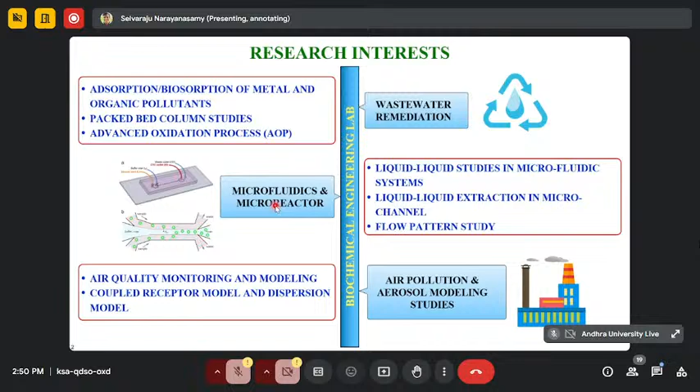So basically we have to develop a novel adsorbent. Why do you want a novel adsorbent? Because it always gives good adsorption capacity. So we are targeting these main pollutants: dyes, heavy metals, antibiotics, and rare earth elements. For example, in Tamil Nadu, Tirupur has heavy dye pollution.

And if you take heavy metals, IIT Guwahati is located near the Brahmaputra River, and we found that heavy metals, especially arsenic, contaminate the Brahmaputra river water more. Of course, in North India there are most of the rivers, especially the Ganga. We used to test most of the rivers, but we found the heavy metal arsenic more in the Brahmaputra water.

Then antibiotics. This is mainly because after COVID, everyone started to use antibiotics and they're simply discharging them to water bodies. Then how we have to remove this also. Then finally we come to rare earth elements. It's mainly from mining activities. Here we deal with rare earth elements, cerium. So in total, the four, how we are going to treat them with adsorption. Then we'll take it to industry level scale.

So once everything is done, we have the toxicity studies. We can even call this a plant doctor. One of them is Professor Lingaraj Sahoo here. So after testing, we go on to test different types of toxicity studies, like seed toxicity studies and then microbial. So finally we come up with evidence that our discharge is safe.

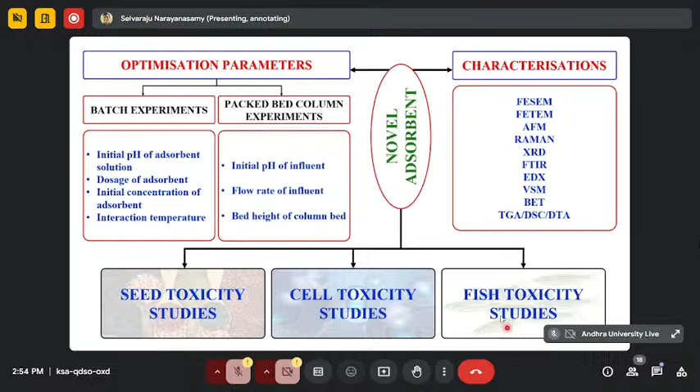After everything is done, of course, we have to go for these studies, seed toxicity studies and different types. So that's the overall picture of our work.

So you take activated carbon, and there are basically two types of modification. One is physical modification, the other is chemical modification. In physical modification, you take any biomaterial and heat it up, so you physically modify it with temperature. But chemical modification means you add some compound, and then automatically you can enhance the adsorption capacity. But I won't discuss this too much.

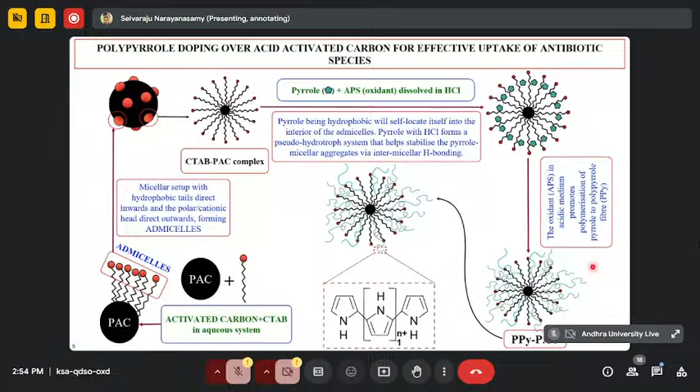So basically we take activated carbon and have done some modification. Finally, chemically modified activated carbon is available. Once done, of course, you have to do SEM and TEM, whether it is really porous and able to adsorb the pollutants. For example, we have different types of pollutants, dyes and others. So how are we going to handle that? We have to check the porous textures before and after. That's the purpose of this.

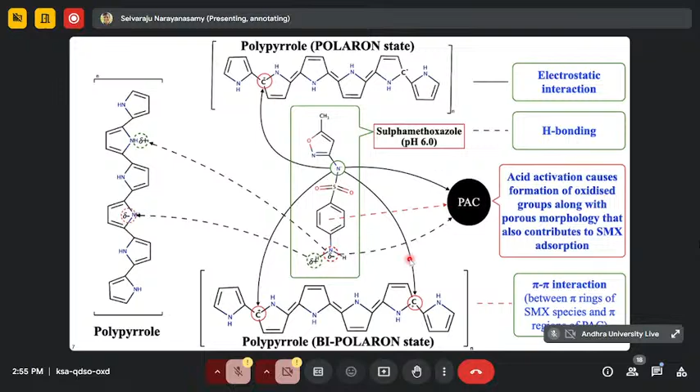This I leave, because then we used to study bonding, the interaction, pi interaction, hydrogen bonding, all, but I'll skip this because this is very difficult to understand. So once that's done, the other one we prepared is called chitosan hydrogel. There's plenty of material available. Normally we use it as a raw material, it's very easy, and cost-wise it is very low. So we can always use it as a raw material for treating dyes or wastewater.

So chitosan hydrogel: you take chitosan hydrogel, then you modify the hydrogel. This is called a surface modified hydrogel. You can see here the surface modified hydrogel. Once surface modification is done, it is ready for your target pollutants. So here, the types of dyes we used: starting with direct blue, then Congo red, then bromophenol blue. You can see before adsorption, then after adsorption.

So how much is the adsorption removal percentage? You can see first the direct blue, initially this one, then how we are able to achieve it. Maximum we can get like 90%, 98%, based on what type of adsorbent you're using, whether it is a chemically modified adsorbent or a physically modified adsorbent.

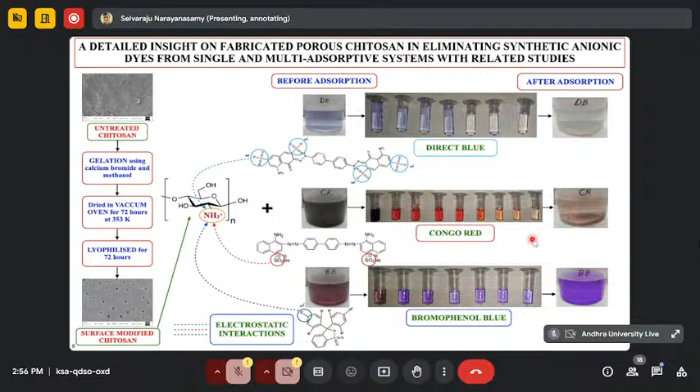Then we tried this one, a fluidized bed. You are all chemical engineers, so you know that one. In a fluidized bed, the particles get fluidized, but if you use a packed bed, the particles never get fluidized. That's the only difference between a fluidized bed and a packed bed. We tried the fluidized bed, but of course the efficiency was not that promising. Then the parameters we got from batch studies, we have to use here to help.

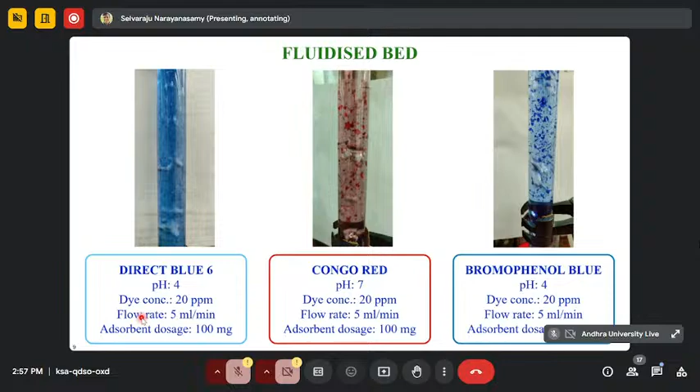Then the other part: so far we tried with this one, so why not try with grass? Of course, at IIT Guwahati the nature is very beautiful, I already told you. So we decided, why not take some grass, make it a powder and make it grass nanocellulose. Then you add some magnetization part. Finally this is a magnetized grass nanocellulose, ready to adsorb cerium.

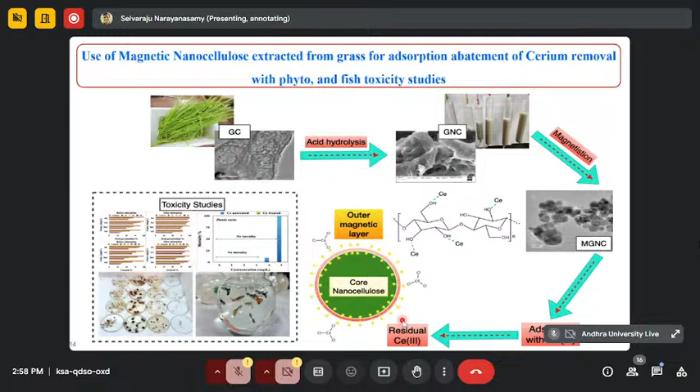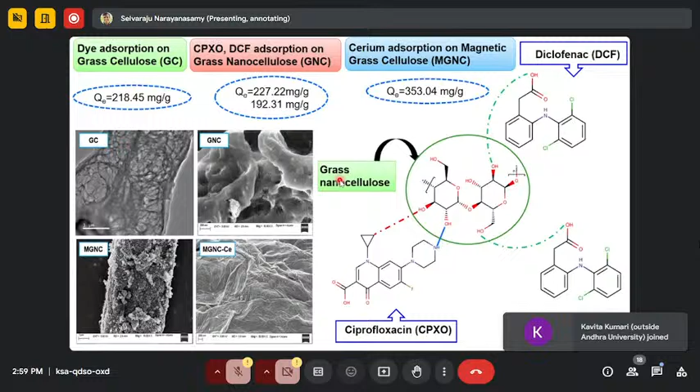These are different studies for cytotoxicity. I will skip them. So far, we discussed the batch experiments. Then why can't we do column studies? This packed bed column we discussed: the biosorbent, biomaterial, adsorbent or physically modified material, you just pack it here. That's called a packed bed column. You can take any type of sample water, like polluted water.

You can take even heavy metal polluted water, like arsenic, because our campus is located near the Brahmaputra, so arsenic is always more compared to other heavy metals. But our water is a little more purified compared to other places. So you can use either dye wastewater or sample wastewater containing antibiotics. The packing material is what we discussed so far: the cellulose, then grass nanocellulose. We have done some grass nanocellulose.

Then we can take even the chitosan as a packing material. You can take any type of material and pass it through the peristaltic pump, but you cannot pass it directly, you have to use some packing support. Then the packing material, then through this, we have to measure the outlet concentration.

So basically, let me repeat once again. Use any type of wastewater, it contains heavy metals, doesn't matter whether dyes or antibiotics. And this material can be physically modified or chemically modified material, and you pass it through this, and then finally we get pure water.

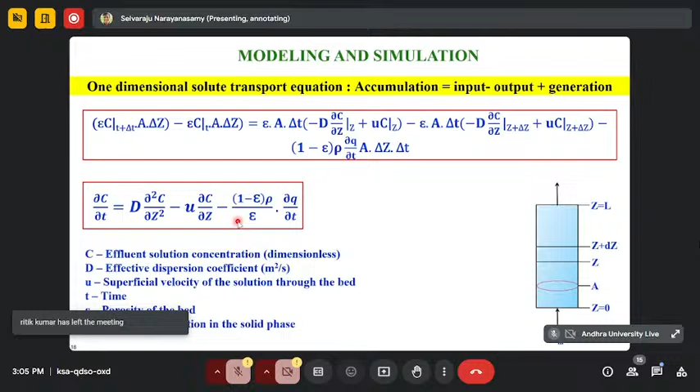So far we're done with this one, and then why can't you try with the recycle mode? This is always called so. For example, if you do straight through mode, the efficiency wise it's always less compared to recycle mode. Even you would have seen somewhere many places the sugar cane juice, how they keep pressing it again to try to extract maximum juice.

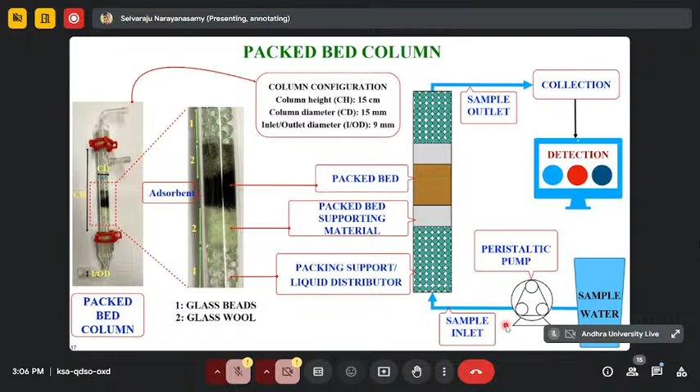Same way here you do recycle of this one. Recycle meaning it goes back. So for example you are passing the sample wastewater going this way, then again collection, again you repass again and redo it. Same process continuously, the exit point you connect with the inlet point. So like recycle mode. If you do that this way, then we'll get more efficiency for that purpose. That's all there is. But the equations are almost the same, only the concentration will change. Rest everything is the same. So of course we get more efficiency compared to the other one.

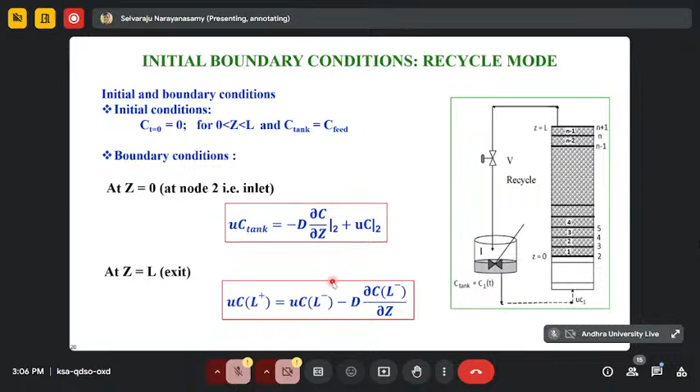We also solved through MATLAB, ode45. I don't know how many of you know the modeling part. So far we discussed about this one.

Then we will discuss about the experimental and the micro channel, how the micro channel works, and the same principle we used for how to remove the phenol water system using this one, but it's a little costly. But why did the micro channel come about?

You can see the difference between old computers and modern computers, same in industries. The purpose of microfluidics, why it came, is because when you want to produce some hazardous or toxic chemical on-site somewhere, in a remote place, of course microfluidics are very simple because you cannot take the whole industry to one place and do this. But if you have raw material, you just make it, get a reaction, then get a product and we can use it directly.

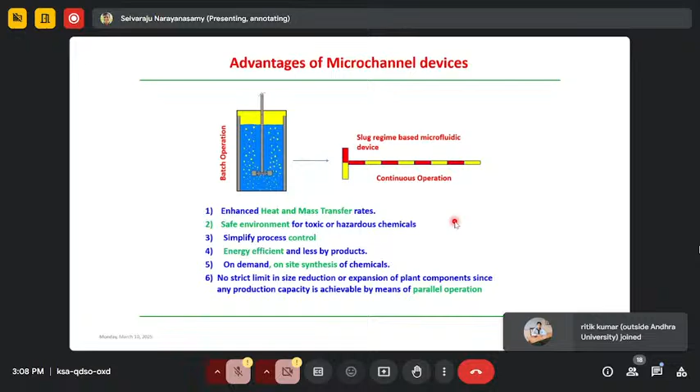That's the purpose of microfluidics because we can easily handle this one. Microfluidics is always less than 1000 microns, we used to call this a micro channel, always compared to a batch reactor. The microfluidics reactor we used to call a plug flow reactor. It always gives good efficiency because the surface area is very high compared to the batch reactor. And one more thing, it always enhances heat and mass transfer rates, and gives on-demand, on-site chemicals, what I just discussed. It's very simple, you can take it wherever you want, you can measure this one.

So where, for example, we use microfluidics in all these places. What we discussed, the same thing: the surface area for a macro channel is very low, but if you take a micro channel it's very high. Same here, Reynolds number, of course all of you know, macro channel is very high, but when you use a small channel, definitely the Reynolds number, which is dV rho by mu, is very low. And the mass transfer here, diffusion or convection, but when Reynolds number is very low, then there's diffusion dominated flow.

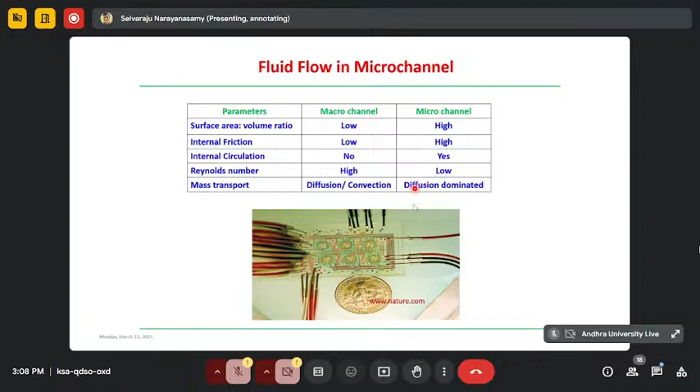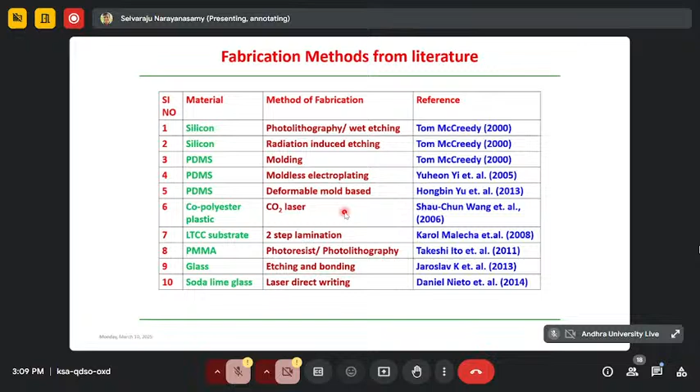You can see the difference here for phenol and water, which is wastewater. Phenol is very toxic, and we want to remove it, so you add dodecane. The dodecane reacts with the phenol, and finally we get water. That's how we can remove the phenol.

To remove phenol wastewater, at point A you have phenol wastewater, then at point B you pass dodecane, which combines with the phenol, and finally you get water. But it's a very costly process. Whenever you want to use it though, let me show an example.

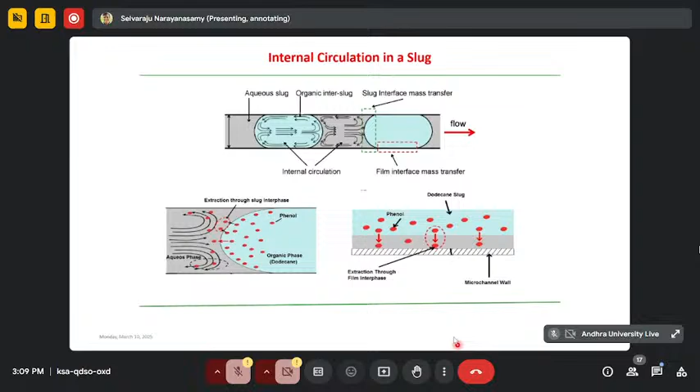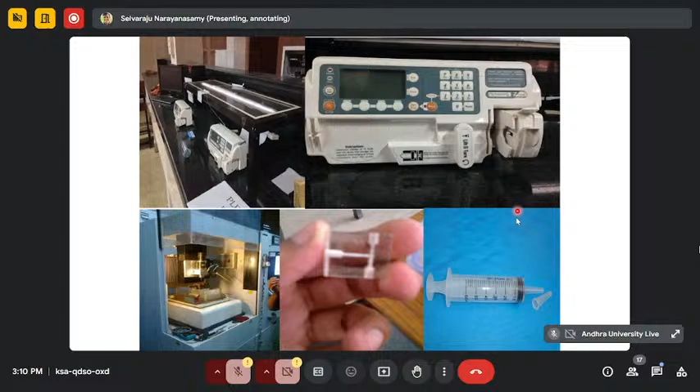This is a setup we used with two syringe pumps and a T-shaped channel, showing how we produce different types of flows. We'll show some videos so you can get an idea. These are the syringe pumps used for these experiments - pump 1 and 2, the T-shaped microchannel, and a camera capturing the flow pattern.

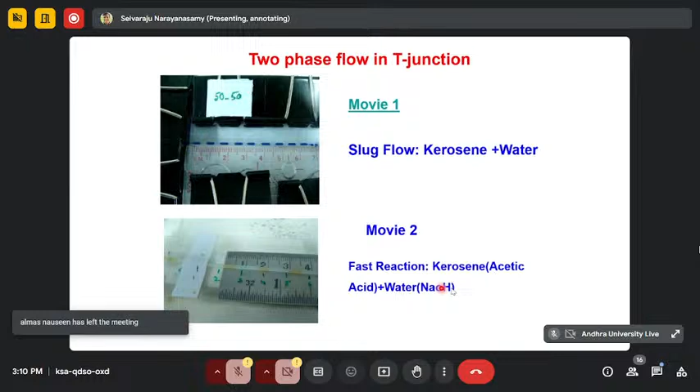Outside this, you see the slug flow with a kerosene-water system, and how the slug flow appears. Another one is kerosene-acetic acid, showing how the color reaction changes. The reaction happens at both sides of the slug flow. This is a simple reaction - we use kerosene, acetic acid, water and NaOH, showing slowly how the reaction takes place from one end to the other. This is a sample of how the reaction happens.

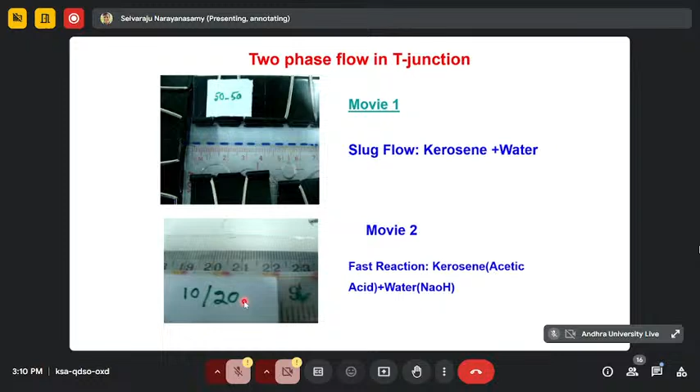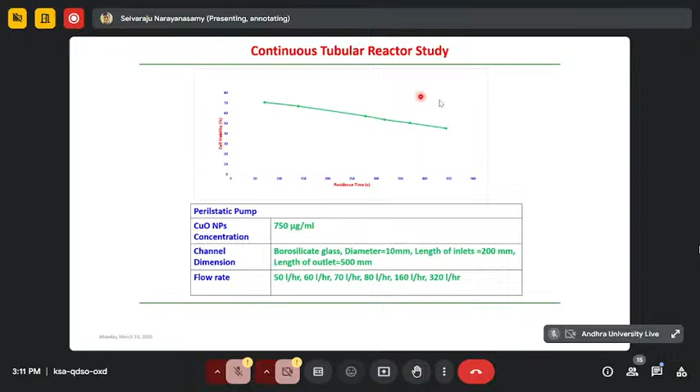We applied the same setup with nanoparticles on one side and microorganisms on the other, to measure cell viability and death rate through this method. We tried it with batch reactors, CSTR, and microfluidic reactors. The microfluidic reactor gives very good efficiency and cell viability compared to others, but the problem is cost - for large scale we can't use it. But for on-site production, microfluidic definitely helps.

So far we've discussed that, and now here's another problem - this is a real industry problem.

This is about the development of an integrated wastewater treatment and fuel production using the ceramic membrane microchannel reactor. We discussed microchannels and different types of reactors and how to use them, but how do you integrate the system - that's very important. This is a 100 lakh DST-sponsored project, joined with ONGC.

As a chemical engineer you know, especially in Assam, Dibrugarh has a lot of oil industries - ONGC, IOCL, and many others related to petroleum. We approached ONGC and they discussed with us, saying they have a lot of petroleum wastewater and asked if we could treat it. We agreed, and this project combines DST, Department of Science and Technology, ONGC, and IIT Guwahati altogether.

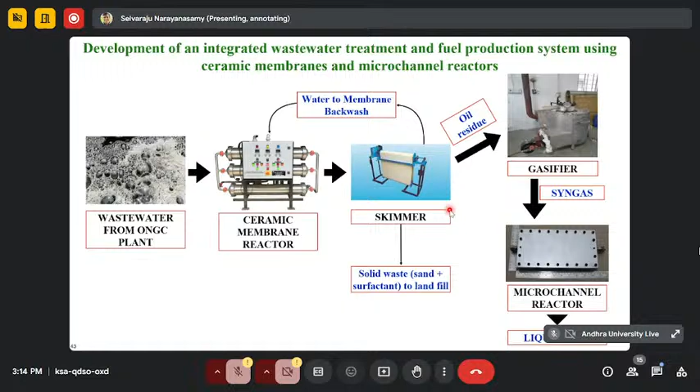So that's my topic also. It starts from lab scale to pilot scale, lab scale through to industry scale. That's the purpose. And we developed our own ceramic membrane reactor. These are the specifications for the membrane reactors, and I've shown the picture for you to understand. So we have a tubular ceramic membrane, what the areas are and so on.

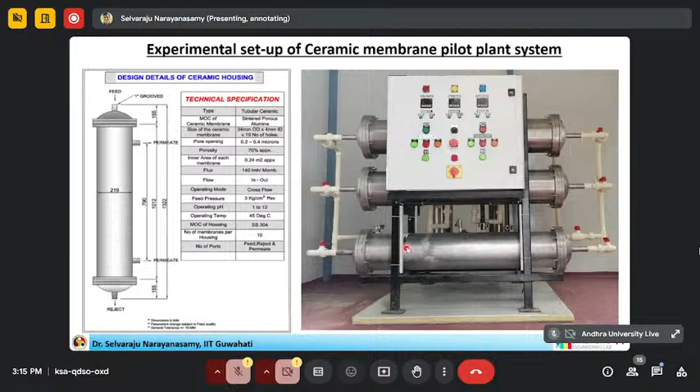So this is completely through automation. It works in three types of mode: filtration mode, backwashing mode and flushing mode. The filtration mode you run for 30 minutes, then backwashing is 1 minute, then flushing mode is there. I will show you something so you can understand. Just wait. Yes.

So here, basically, there are two tanks. The tanks contain ONGC, oil and natural gas, wastewater; they produce 10,000 liters. The wastewater goes directly to what's called a feed pump. The purpose of the feed pump is to pump the wastewater. Then here we have a 20 micron cartridge filter we are using.

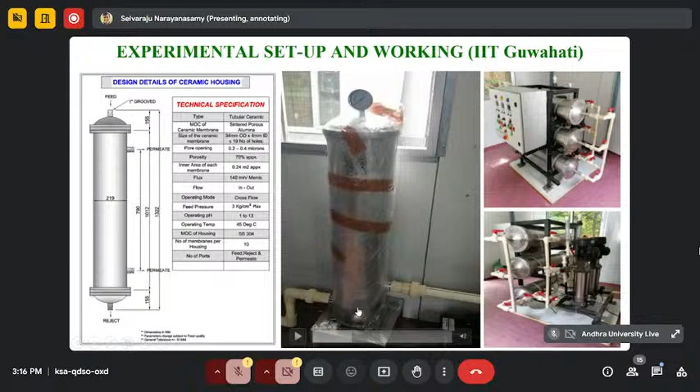That means whatever is above 20 micron will all be trapped here, and only less than 20 micron goes on. Once it's less than 20 micron, it goes to the next one, the 5 micron. We have four different cartridges here. This always works with less than 5 microns, so most of the particles will be settled here.

Once that's done, it goes to the high pressure feed pump. Because we want the ceramic membrane reactor to work, we have to use the high pressure pump here. Here we can see three types of mode: filtration mode, backwashing mode, flushing mode. What is the filtration mode? For 30 minutes you continuously pass it; the filtration mode works the first 30 minutes.

Then of course the membrane gets choked, so you use backwashing to remove that. Then flushing, and after that chemical cleaning is also there. This all works within 1 minute, so it's completely automated: filtration, backwashing, flushing. Then finally we get the outlet. Whatever we are not able to remove goes back to the ONGC wastewater.

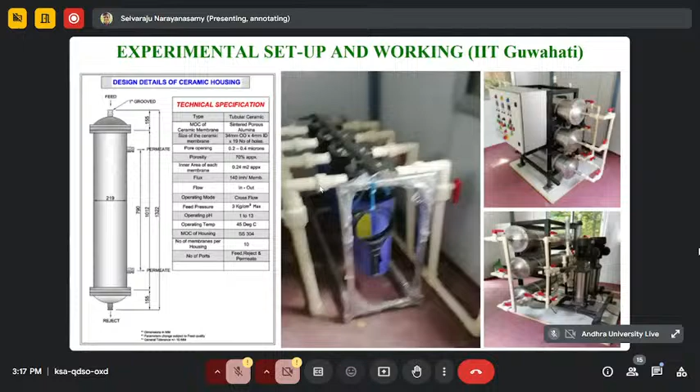Again, to repeat: this is 10,000 liters, 5,000 and 5,000. It goes to the raw water feed pump, which only pumps the raw water onward. This cartridge is a 20 micron cartridge, so we remove the above 20 micron particles here. Then it goes to the less than 5 micron stage; we have four different passes. Then we pass through the ceramic membrane reactor,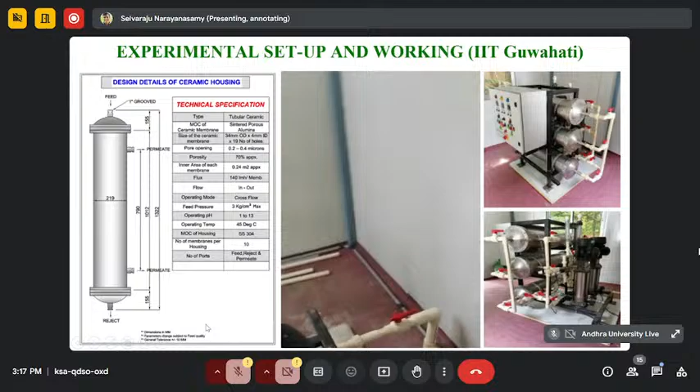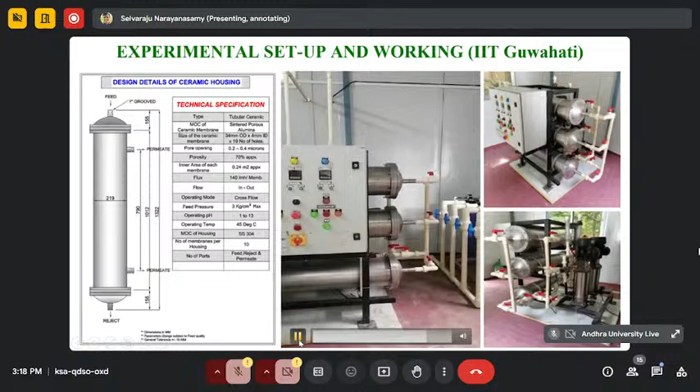which works with 30 minutes filtration mode with a high pressure water pump. If the membrane gets choked, you use the flushing mode, backwash, all types of things. Once everything is done, we can do chemical cleaning; we can add even hydrochloric acid, different types. Then if you are able to remove this, we can reuse it. Normally, the same membrane we can use at least 10 to 15 years.

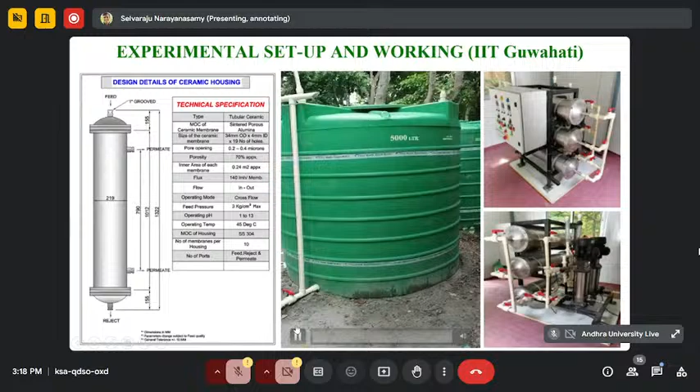And then another problem is the Brahmaputra river water. We noticed a lot of microplastics are there. Even if you take small type of salt, the salt also contains a lot of microplastics. But the problem is, now a lot of research is going on. If you take microplastic, then even the lifespan is also getting decreased unknowingly. So then this problem, why do we want to do this?

So you take some Brahmaputra water and pass it through the raw water tank. The raw water tank contains different types of contaminants. One is the emerging contaminants. The emerging contaminants: anions, then cations, then organic pollutants. This contains a lot of antibiotics or different types of organic pollutants. Then microplastics are also here. So the first problem we worked with was the petroleum wastewater.

This one is the Brahmaputra river water, that water we are taking. The river water contains a lot of heavy metals. But compared to all over India, the Brahmaputra water near Guwahati, IIT Guwahati, is good. Not that bad, but still they approached us to see if we can do this. So then we started the same way.

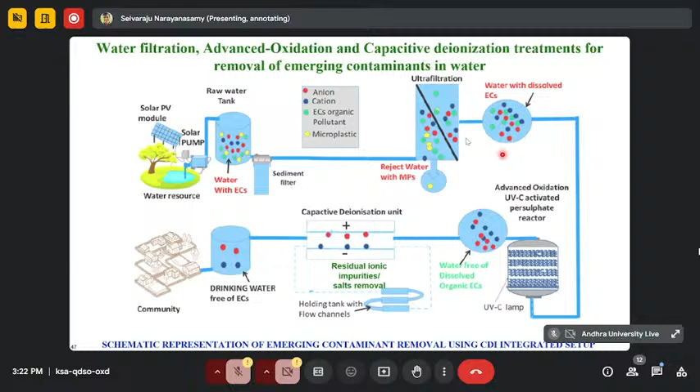The batch process. Whatever we discussed in adsorption, I just put up here. Why I want to share this is because we started with small scale, worked with batch, and how we are moving from batch to industry level or bigger level. For example, this gives 500 liters per hour of drinking water free of all ECs, emerging contaminants. This is also a 1 crore DST sponsored project, working with some other institutes.

I work on some air pollution, but I have another meeting, and we have done some modeling part, so I think I'll skip it. These are air pollution measurements. You can see Delhi is highly polluted compared to all over India. Then we worked with them and started to measure the pollution. You can see there is a difference between before and after doing experiments.

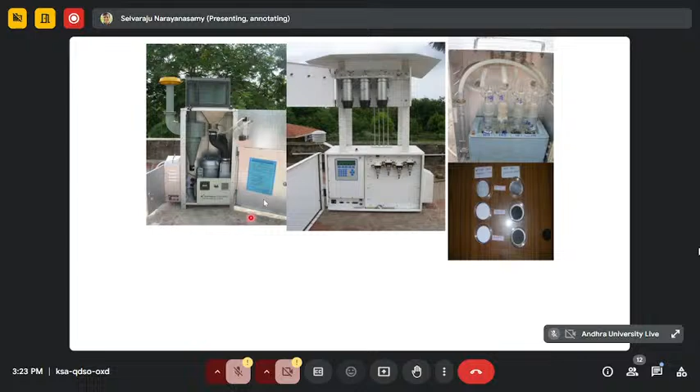So basically this is all collecting the air pollution. Air pollution means a lot of dust particles there. Those particles are collected using this filter paper. Then we can do a lot of analysis. This is called a speciation sampler, and maybe a high volume sampler. I don't know about all of you. It's completely the modeling part.

So I just skip it because I don't want to do too much here. We have different industries, say for example Hyderabad, or Vizag, Visakhapatnam. Wherever different industries are there, assume five different industries are there, and you are measuring concentration here. That means the instruments we kept here, and you are measuring concentration. So all five industries are contributing; how much contribution is happening, that we can use, do some modeling, and find which one it is.

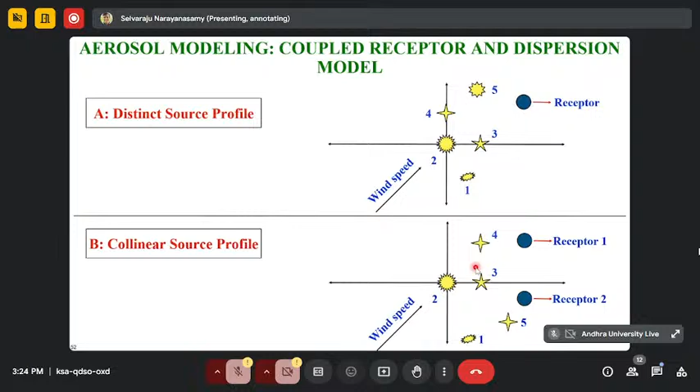But the problem is if two industries are the same, like two sugar industries, then we cannot solve because we don't know which industry is polluting. The same way I already informed, A plus B equal to 1, we cannot solve. So you have to bring one more receptor here and then we can get a clear idea which industry is polluting. I'll skip it; there is all this little modeling.

And again, these are all my current outputs. I have 6 PMRF students, all with the 70,000 fellowship. Then they're getting 2 lakhs for the project also. All credit goes to my students, because without my students I cannot do it. This is a big group from IIT Guwahati. These are little old photos. And again, NIT students and IIT students all together.

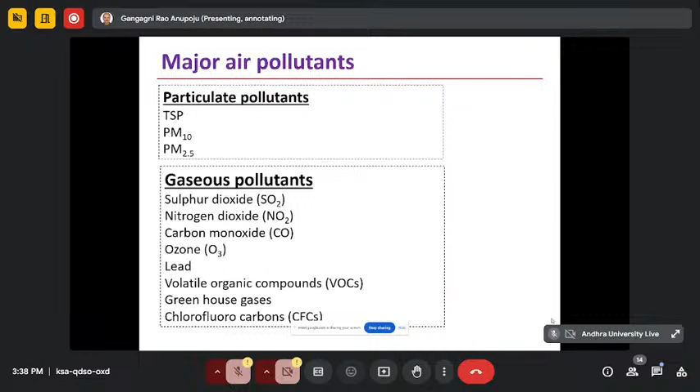If you look at the industries, all chemical industries, for example tannery, bulk drug industry, polymer industry, food processing industry, fertilizer industry, effluent treatment plants, poultry farms, you will get a lot of malodors, because these emissions contain not only H2S and ammonia but also volatile organic compounds. They are malodorous, toxic, corrosive, and have adverse effects on occupational health and environment. The people working in the industry, especially tannery, also get affected, as in bulk drug and pharmaceutical industries. And because of these emissions, there are many complaints from the public.

So the image of companies also goes down very badly if the emissions are not properly controlled. That is one of the reasons why emissions need to be controlled, from the public image point of view, occupational health point of view, overall health of the public living around these areas, and environmental point of view, since buildings get corroded.

Industrial gaseous pollution, as I told you, ammonia, hydrogen sulfide, mainly volatile inorganic compounds. These are the smelling compounds, sulfur odor causing compounds. There are volatile organic compounds also, VOCs, as we call them generally. These VOCs are amines, sulfur compounds, aromatic compounds, chlorines, volatile fatty acids.

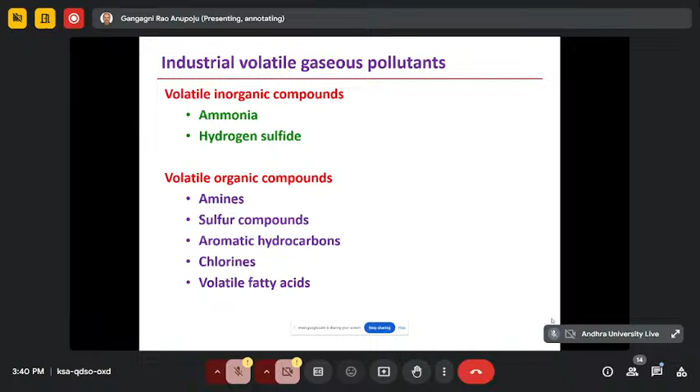Sulfur compounds, even mercaptans, which are at very, very low concentrations, smell heavily. For example, we have actually collected some emission data in and around some industries; one of my students did a PhD on biofilters. That is the reason why today I'm talking at length about this.

For example, in a tannery, ammonia is around 125 ppm, H2S 80 ppm and VOC 120. Whereas if you look at threshold limit values, it is 25 for ammonia, 10 for H2S and 0.5 to 1 for VOC. So there are a lot of drastic differences. That's why if you go to tannery places, there is tremendous smell in that area, and people cannot live very happily. That is the reason why there is always a demand from the public that these industries need to be shifted. In this context, control measures are very, very important.

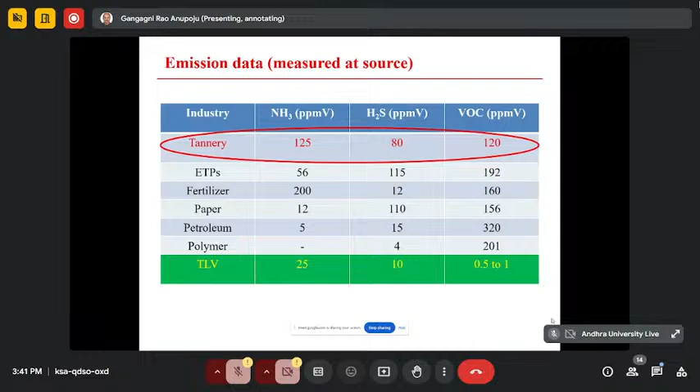Impact of pollutants on humans and environment, as all of you know: greenhouse gas effect, ozone depletion, acidification. These acid gases can form acidification and smog, and eutrophication. Eutrophication in the sense that in water bodies, because of eutrophication, weeds get formed, and human health, ecosystem health and so on. Chemical engineers mostly use different techniques for the control of gaseous pollution from industries.

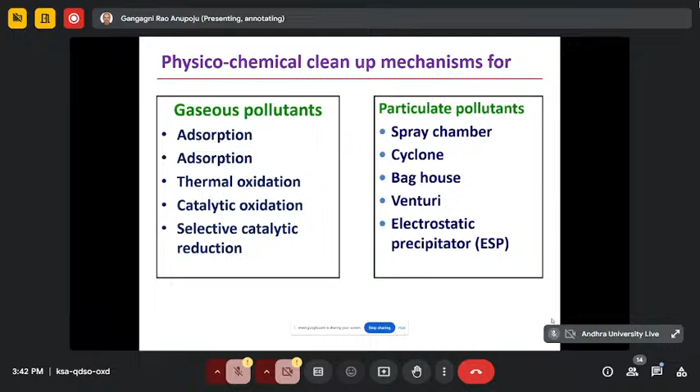For example, absorption, thermal oxidation, catalytic oxidation, selective catalytic reduction, and for particulate pollution, mostly for coal power plants: spray chamber, cyclone, baghouse, venturi, electrostatic precipitator. These are some of the equipments and unit operations used for the control of emissions in industries in general. The advantage is that these are all proven technologies. But the disadvantage is high treatment cost, capital and operating, and generation of secondary pollutants.

As I told you, if you try to remove gaseous emissions, VOCs, H2S and other compounds, it ends up in acid products. H2S will become acid in liquid effluents. Organic compound emissions result in COD in the liquid effluents, and again treatment is required. That is the reason why several step procedures are required for the treatment, entirely for ZLD. So these technologies, even though well proven, are very costly, and that is one of the limitations.

One more thing we have seen in refineries, for example, in Kochi refinery. They have a bitumen dehydration unit, with a catalytic oxidation process for the removal of emissions coming from dehydration. But still around 500 ppm of H2S, ammonia and VOCs are left out, which are smelling. So for emissions with low concentrations, the suitability of these technologies is very, very poor. There this biological method comes into the picture, emerging as a very good alternative.

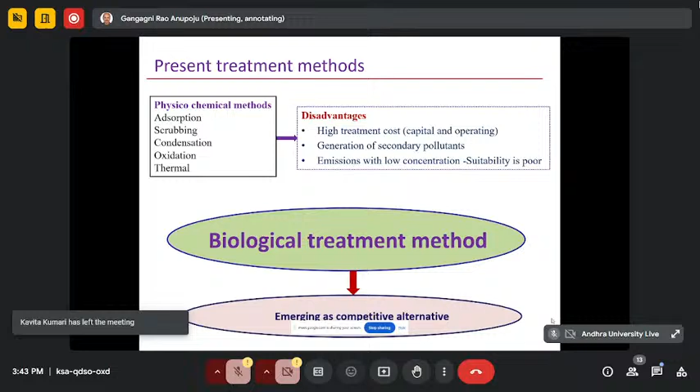In fact, in European and Western countries, it is already a great technology, competing with the physicochemical methods and taking its own place very rapidly. In the biological methods, there are three: biofilter, biotrickling filter, and bioscrubber. The advantages are low treatment cost, sustainable technology, no secondary pollution generation, and highly suitable for tail gases, which means gases having low concentrations. These technologies are mainly suitable for high volumes of gases with low pollutant concentrations, very efficient and advantageous in contrast to physicochemical methods. That's why it is sometimes complementary to physicochemical methods.

As I told you, this biological method degrades the contaminants into innocuous, less contaminated products. For example, the ultimate products are CO2 and H2O. H2O is no problem. And CO2, even though it is a greenhouse gas, is acceptable to some extent compared to these harmful gases. So bioscrubber, biotrickling filter, and biofilter are the three technologies available for the treatment of gaseous emissions and VOC removal from gases.

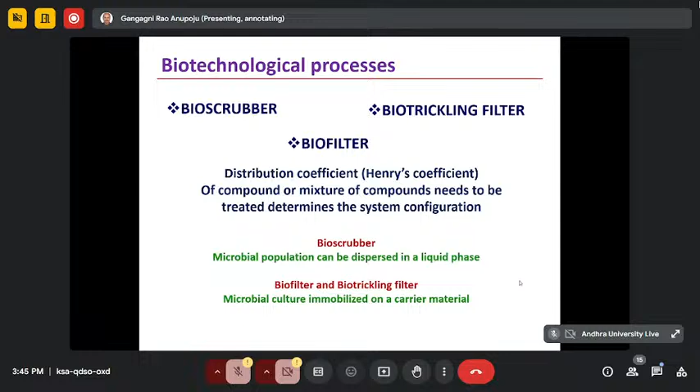So how to select? The distribution coefficient, what we call in chemical engineering the Henry's coefficient, of a compound or mixture of compounds to be treated determines the system configuration. We have to understand the Henry's coefficient of the particular compound; only then can we decide whether to select a bioscrubber, biofilter or biotrickling filter. That decision depends on the Henry's coefficient, which is called the distribution coefficient.

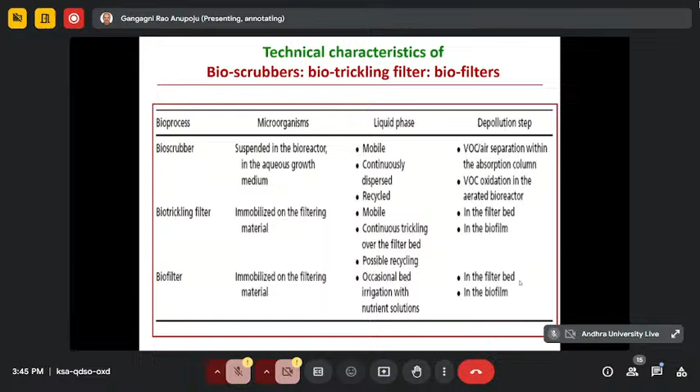So in technical characters, if you look at bioscrubber, what happens is that this polluted air goes from, typically like a chemical scrubber, it goes from bottom to top. From the top, liquid is sprayed.

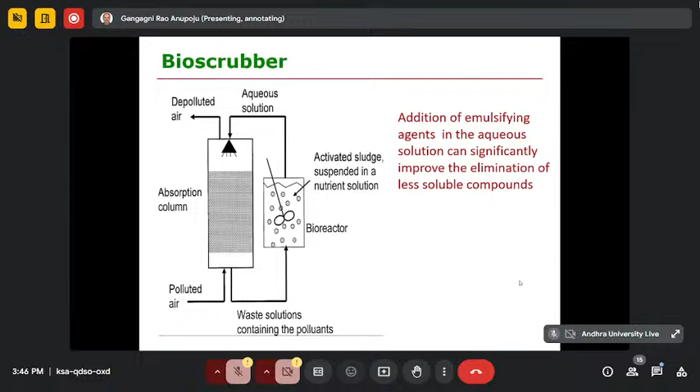So it typically looks like a chemical scrubber, but microbial consortia will be there instead of chemical. That is the only difference. There are good advantages like operational stability, less pressure drop, good control of biological parameters, and less space requirements. But the only limitation is that only readily soluble VOCs can be used, like those with low Henry's coefficient.

There's also production of sediment sludge and wastewater, which again needs treating with a bioreactor. These are the disadvantages. That's why people developed another technology called biotrickling filter.

In this, there is a packing bed of materials like a packed bed reactor, and microbial consortia is immobilized on that packed bed material. Gas goes from bottom to top, while liquid flows with a very slow rate, and that's why it's called trickling, as it trickles down from the top.

During this process, the microbial consortia degrades the compounds, forming CO2 and other respiratory products. Recirculation of liquid is continuously necessary, but there is a possibility that the filter can clog because of excess growth of microbial consortia. That is one of the disadvantages.

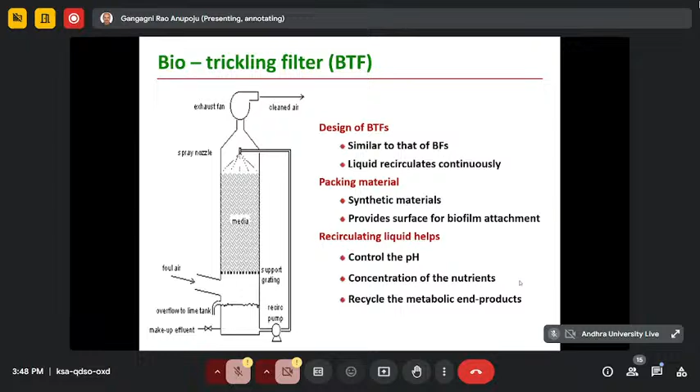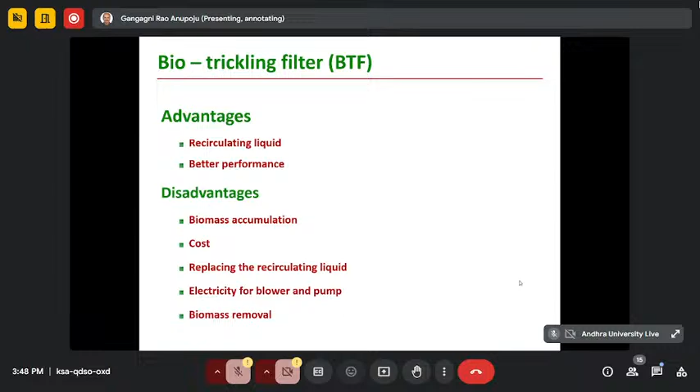We have to use very good synthetic packing material. The construction is a little costlier than the scrubber, but there are several advantages in contrast to the scrubber, which is why this is called biotrickling filter. Other drawbacks include biomass accumulation cost, the need to replace recirculating liquid frequently, and the need to use a blower and pump. Despite these factors, these are proven to be better than bioscrubbers.

Now another technology called biofilter. This biofilter, instead of synthetic bedding material, uses organic bedding material which is naturally available, and microbial consortia is immobilized on that. The polluted gas goes from bottom to top, and during this the microbial consortia degrades the entire polluted compounds.

The gas, before going to the biofilter, needs to be humidified, because the bedding material's moisture content needs to be well maintained. That is important. The bedding material should also have all the nutrients, which is why naturally occurring organic bedding material should be used. I will let you know what the different bedding materials and their characteristics are.

As usual, it needs an exhaust fan or blower to let the gas into the biofilter and come out. These biofilters can also be constructed very easily in soil, and on top of it you can put a garden. I have seen several of these biofilters in Europe when I went there. Every chemical industry mostly has these biofilters because when they get low concentration of pollutants with high volumes of emissions, these biofilters are proven to be very good.

The pressure drop is also very low, and the bedding material needs to be replaced only every 4 or 5 years. The bedding material, embedded with microbial consortia and sulfur and organic compounds, can be directly used as a soil conditioner. So there are no harmful products in this.

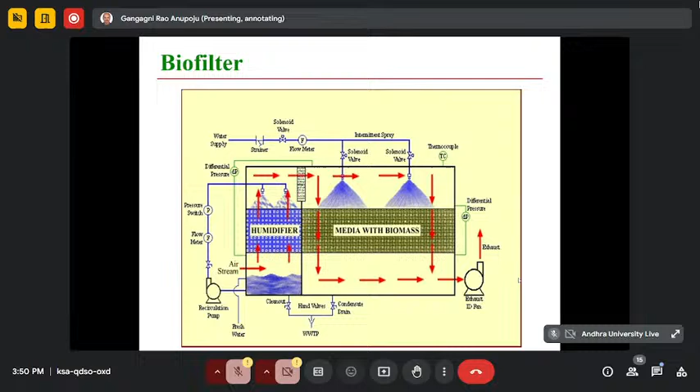The mechanism is that a biolayer forms on the filter material, and when the gas flows, the gas which has an initial concentration C high goes down to C0, meaning during the process in the biolayer, entire degradation happens. The initial concentration of pollution gets down to almost the final concentration. Transfer of compounds from gas phase to water phase happens in the biolayer, as does oxidation of the absorbed compounds by the bacterial species present in the biofilter. So it is a two-phase process consisting of gas phase to liquid phase to degradation.

So biolayer has several roles in biofiltration: aqueous environment for bacterial life, nutrients for biological activity, acts as a water-air interface, and acts as a reservoir of byproducts of the reaction as well. So much interesting phenomena is happening. Biofilter looks very easy, but the interesting phenomena happens over here.

Low investment, easy to dispose bedding material, low pressure drop, little effluent water - very little leachate will come. That can easily be sprayed back to improve the moisture content of the bedding material. The only issue is the requirement of large surface area, but as I told you, these can be constructed underground as well. Periodic replacement of filter material is required, approximately every 3 to 4 years, and difficulty of monitoring - monitoring is not very easy.

Humidity and pH of the filter material need to be maintained, depending on the efficiency and concentration variation. Too much variation in concentrations is an issue - for example, if you are designing for around 500 ppm H2S and ammonia, it cannot allow 1000. It should be in the range of 5 to 10% variation, so maybe 600 to 400 is allowed. So those are some of the limitations.

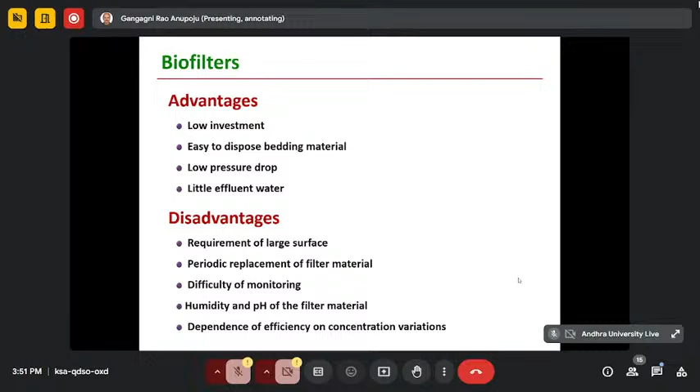As I told you, bedding material is very important. Soil mixtures, compost, bark, coconut coir, peat, carbons, or a mixture of these can be used as bedding material. Characteristics of the medium, correct C:N ratio for bacterial support, is important - around 1:20 to 1:50. Water absorption ratio around 40, water retaining capacity around 40 to 60. For example, coconut coir has very good retaining capacity - it's an excellent material for bedding.

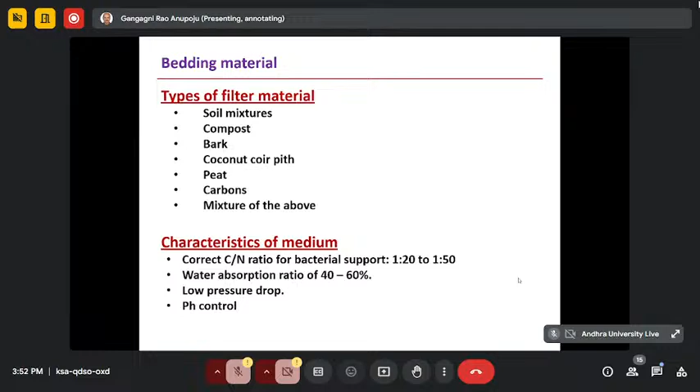So it should offer low pressure drop, there should not be any compaction, and pH control should be there - it should not get acidified very fast. Important operating and design parameters are pH, temperature. Generally, biofilters are operated at ambient temperature, in the range of 30 to 40 degrees centigrade. Carbon, nitrogen, phosphorus, and the bedding rate are very important.

The important parameters in terms of performance measurement are empty bed residence time, volumetric gas loading rate... sorry. Empty bed residence time is one of the important parameters for performance evaluation. Volumetric gas surface loading rate, pollutant mass loading rate, elimination capacity, removal efficiency - these are important parameters. Now I will explain these things to you, how to calculate them.

There are so many compounds already proven to be very good biodegradable compounds in biofilters: benzene, toluene, hydrogen sulfide, carbon disulfide, mercaptans, dimethyl sulfide, dimethyl disulfide, ammonia, methanol, ethanol, propanol, butanol, aldehydes, butyraldehyde, pyridine, acetone, styrene, xylene, methanol, methylene chloride, dichloromethane, tetrachloroethane, nitrogen oxides, isopentane, ethyl acetate, gasoline, and VOCs. All these have proven to be useful.

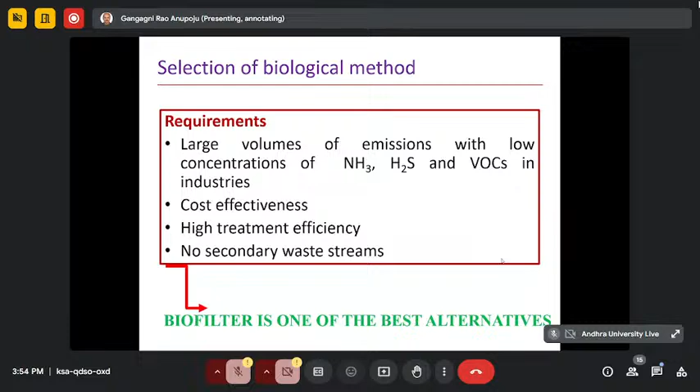As I told you, empty bed residence time is the gas residence time within the biofilter packed bed. How to calculate this: volume of the biofilter divided by volumetric flow rate. Regarding units conversion, surface loading rate is the amount of air passed to the biofilter per unit surface area per unit time - so meters cube per meter square per hour, Q by A, flow rate by area.

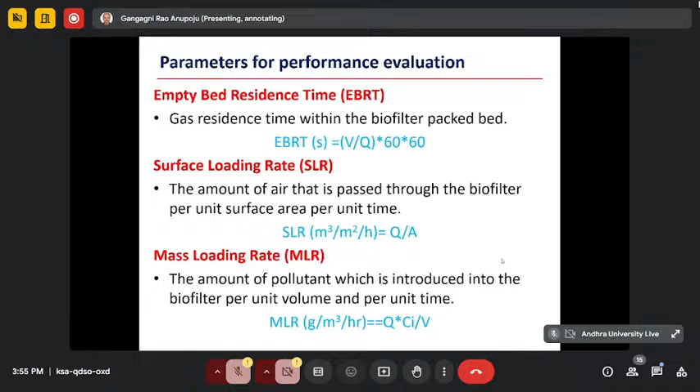Mass loading is the amount of pollutant introduced into the biofilter per unit volume per unit time: Q, flow rate, multiplied by initial concentration, divided by volume of the biofilter - that is gram per meter cube per hour, these units.

Elimination capacity is the amount of pollutant removed per unit volume of biofilter per unit time - gram per meter cube per hour: Q, volumetric flow rate, multiplied by Ci minus Co in brackets, that is amount of pollutant inlet minus outlet, divided by volume of the biofilter. Removal efficiency is the fraction of pollutant removed in a biofilter expressed as a percentage: inlet minus outlet divided by inlet, into 100.

Space velocity, the velocity of the gas through the biofilter, also plays a very important role - Q by V again. So these are the variety of parameters which need to be calculated for a biofilter to understand its performance.

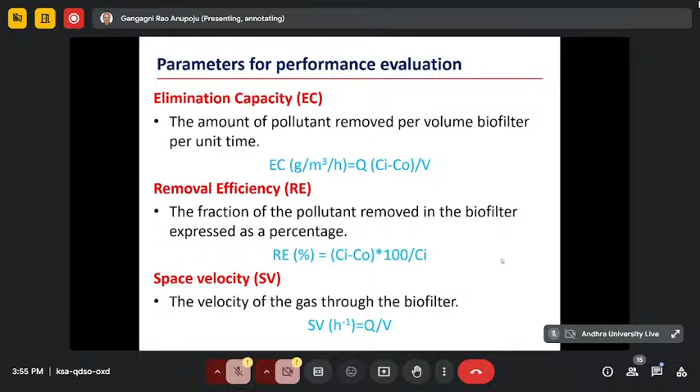We have done a lot of studies in our institute, almost 2 PhDs completed on this subject - one is Dr. Bharat and another is Dr. Kiran Mani. We made an experimental setup, with 1 meter height of bedding material.

Diameter is 0.04 meter, and approximately total volume is 1.4 liters, working volume is 1.2 liters. We operated this biofilter at ambient temperature, and this is the experimental setup.

For bedding material, we used coconut coir with rice husk, wood chips, and polyurethane foam, all mixed together. Polyurethane foam was also packed in between to reduce the pressure drop.

These are the variety of characteristics we analyzed: bulk volume, moisture content, bulk density, total solids, volatile solids, water holding capacity, CHNS, and NPK. All these parameters were analyzed.

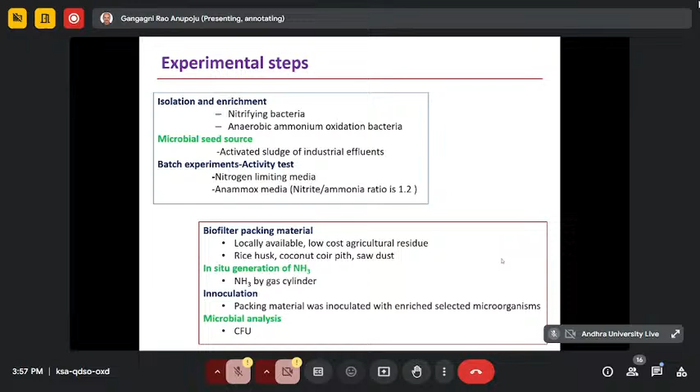We isolated microbial consortia, and microbial assay was done completely using nitrogen limiting media. We used an NH3 gas cylinder for ammonia. Microbial analysis CFU was also done, and the bedding material was completely packed.

Operating parameters: moisture content is very important, we maintained 55 to 60 and 70 to 80 moisture content levels to understand which works better. We used 60 to 10 seconds EBRT, empty bed residence time, as one parameter. We operated for 90 days with inlet concentration in the range of 10 to 250 ppm.

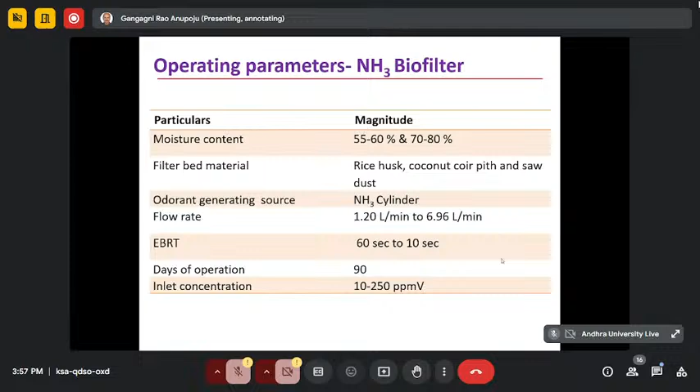This was ammonia, and we got very good efficiency, 99%. EBRT of 20 seconds was optimized. Mass loading rate was 34, space velocity 178. Ammonia was converted to nitrogen gas through simultaneous aerobic nitrification and anammox process.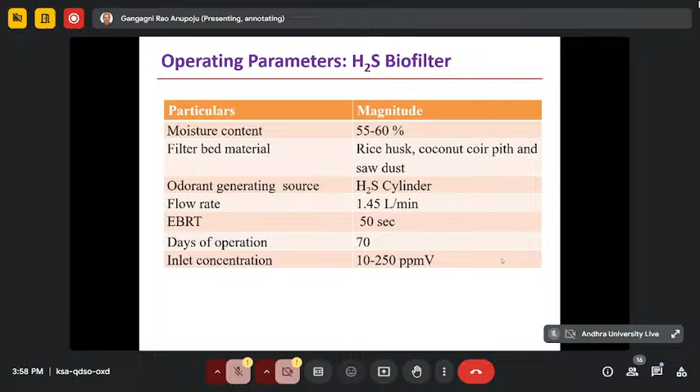We also studied operating parameters for the H2S biofilter, operating it under 10 to 250 ppm. We got 99% removal. In this biofilter, getting above 99% removal is important, because otherwise the biofilter will be inefficient, as the threshold limit of H2S is very low.

For H2S, the threshold is less, below 10 ppm, so we should not exceed it. If the inlet concentration is 220 ppm, we should achieve above 99% removal, then only the outlet will be below the threshold limit.

Compared to the nitrogen ammonia biofilter, here EBRT is more, meaning residence time is high. These are the important parameters we have to study during experimentation so that these design parameters will be useful.

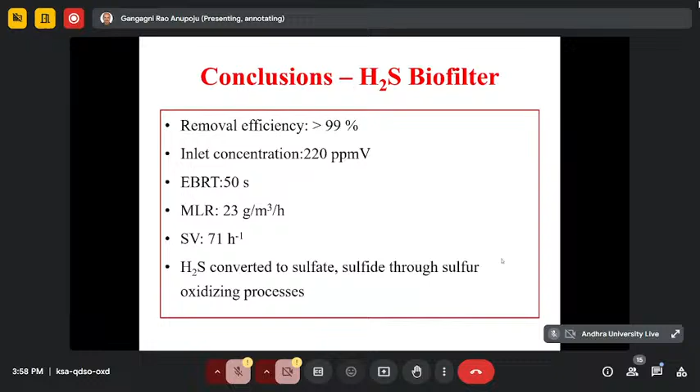H2S is converted into sulfate, sulfide through the sulfur oxidizing process. That is the mechanism.

We also used triethylamine, another compound, and again changed the EBRT and flow rate. Finally, the packing material used was wood chips and rice husk, which we kept changing as well.

The mechanism is that triethylamine gets converted into diethylamine, ethylamine, amine, and ammonia through the oxidizing biological process. We got very good reductions there as well.

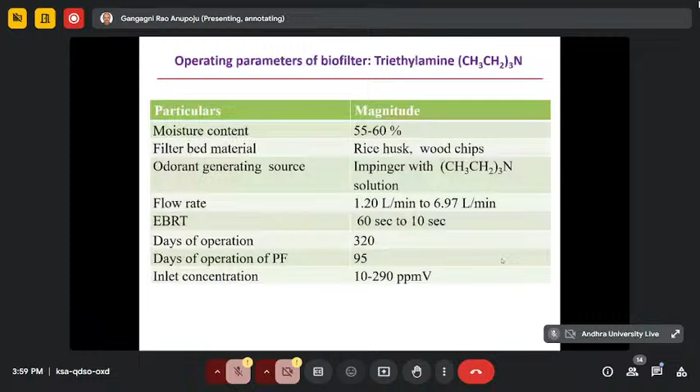I think I forgot to put the slide, but we got above 99% reduction. EBRT was 20 seconds, and pH was maintained at 7.5. Operating temperature was 20 to 30, at ambient conditions.

Another compound we tried was ethane thiol, that is mercaptan, and we got very good removal efficiency with this as well. The bedding material was again wood chips and rice husk, with the same moisture content maintained.

For this compound, EBRT is more, 180 seconds, whereas for ammonia it was EBRT of 20 seconds. For triethylamine, it was 60 seconds.

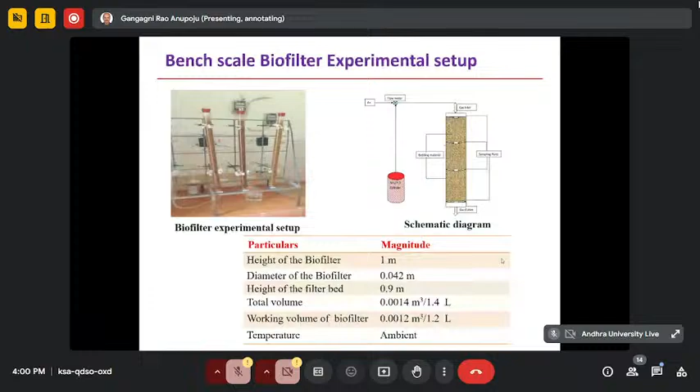This pilot scale biofilter has a height of almost 1.62 meters, length 1.45 meters, breadth 1.15 meters, and active volume of 2.45 cubic meters.

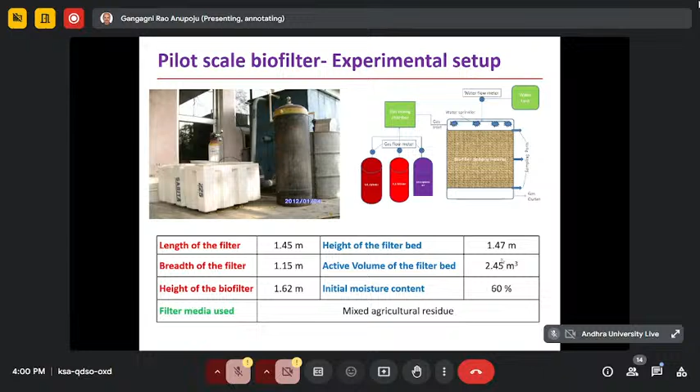We used mixed agricultural residue in the bedding material, individual cylinders for atmospheric air to completely control flow rates, and a water tank for spraying water from the top. This is one side, you can see the entire setup over here.

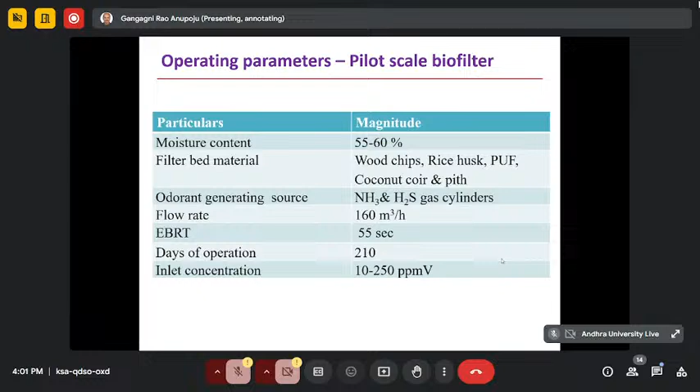Wood chips, rice husk, polyurethane foam, coconut coir and coir pith were used in this setup. 55 seconds was the optimized EBRT we used, operating the plant for 210 days between inlet concentrations of 10 to 250 ppm.

Our conclusion was that at an inlet of 210 ppm with 55 seconds EBRT, we achieved removal efficiency above 95%, with low outlet concentration, pH of 7.8, and moisture content around 60%.

Based on all these studies, we designed a full-scale biofilter at a place called Erode, where the S.A. Abdul Azeez leather industry is located.

People cannot stay even for 1 minute, but the workers are working because they are habituated and because that is their livelihood. That is why, even though occupational health issues are there, they are working. So what we did, we fixed 3 exhaust blowers in this section. The entire malodorous gas was taken out and put into the biofilter.

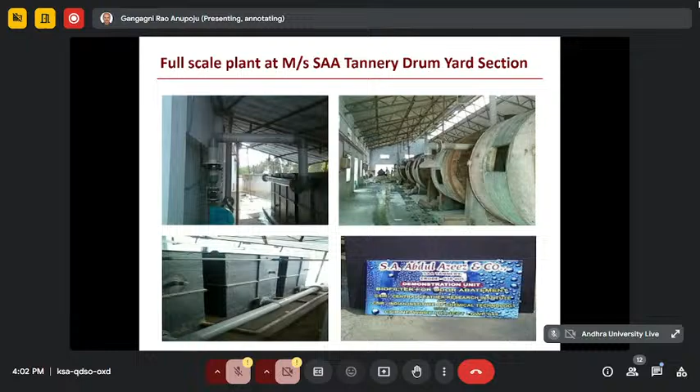You can see the left side biofilter, you can see the structure. We put 3 biofilters; from 3 exhaust fans we connected to 3 biofilters. And when the gas is passing out, there is no smell at all. That's why fresh air was always coming to the drum yard section. Whatever is contaminated is getting purified in these biofilters. This biofilter has been operating for almost 8 years now, continuously. Only in between we changed the biofilter bedding material.

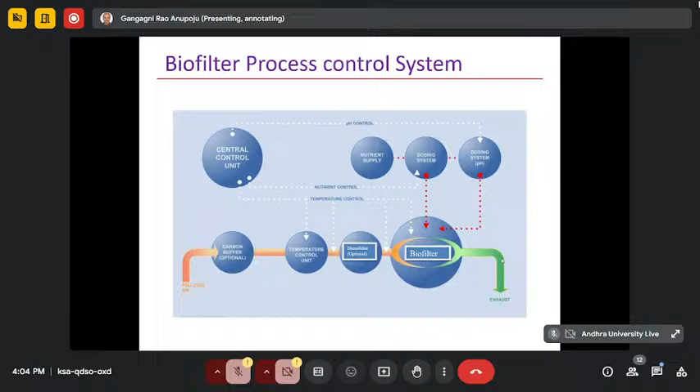One of my PhD students stayed almost 6 months there and operated the biofilter to see its performance. It has a lot of control units also. As I told you, the gas going to the biofilter should be humidified, temperature should be monitored, and we should keep supplying nutrients. Whatever leachate is coming, we'll analyze for pH, and if any nutrient deficiency is there, nutrients should be dosed. We made a central control unit for all these things, and the exhaust gas needs to be analyzed every day using GC or suitable methods for H2S, ammonia, and organic compounds.

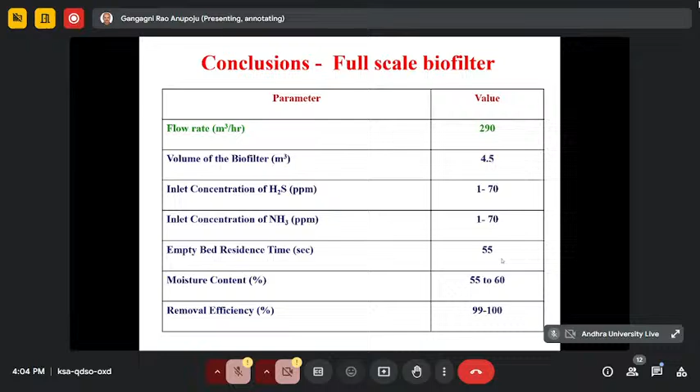And performance on full scale, you can see this. This is actually the first 30 months of data, when our PhD student was there. Now it has been operating almost 8 years, and we have got very good results. People are very happy. In fact, the government of Tamil Nadu at the time was ready to promulgate a law saying that every tannery should have this biofilter, but somehow that could not happen. So this is the nutshell of the lab scale, pilot scale and full scale work.

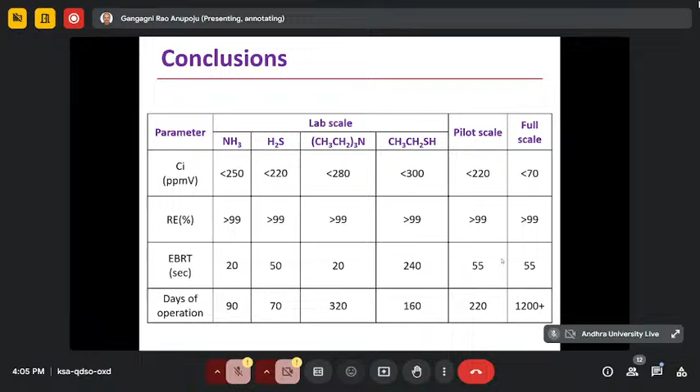I can make conclusions with this table. Empty bed residence time is one of the important parameters; it varies from compound to compound. That is the important design factor and it should be understood very well. And removal efficiency we have to measure. Biofilters need to be operated continuously for longer durations, so we operated from a minimum of 3 months to almost 1200 days, and I think 8 years plus. Only then can the performance evaluation be made; otherwise it is not possible.

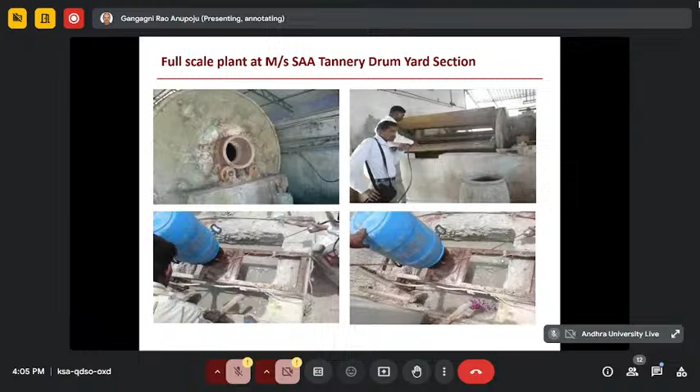So the biofilter technology developed by IICT is very low cost, environmentally benign, with easy installation and operation, and purification of emissions happens at source. You will be surprised, the biofilter we constructed at this place cost us only 8 lakh rupees, with so many benefits. After that, we also installed one at the Fleming Laboratories bulk drug unit in Hyderabad. We were about to install at the common effluent treatment plant in Vijayawada, but they backed out. I think the CETP is closed now, that's why they stopped, even though they had given the order to us.

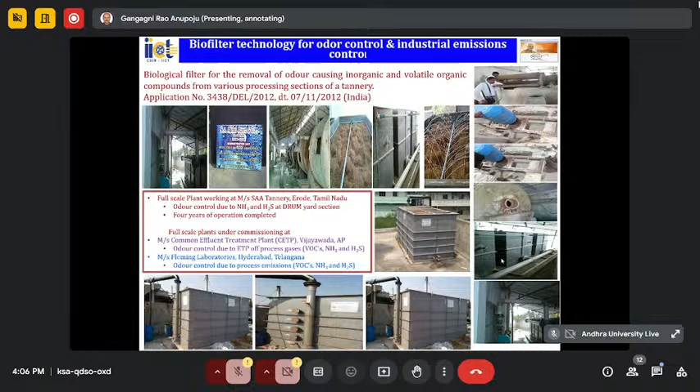So this biofilter, in a nutshell, what I can say is that it is a very good technology for emissions control, for VOC removal and odour control, especially for low emissions. For example, for low concentrations of compounds and high volumes, the biofilter is very good for the chemical industry. I think students also should keep working in this area. Researchers should also think about this, so that we can give advice to so many industries.

Now, most of the industries, when I'm a member of this pollution control board, a task force member, CF member, I'm observing most of the people don't know about these biofilters actually. So that is the irony of it, and we have to explain to the chemical engineers. I think we need to propagate it, educate them, and design these biofilters, which are very cheap and cost effective. Thank you once again for giving me this opportunity.

What an informational and insightful session we have just experienced. We sincerely thank you, sir, for sharing your invaluable knowledge on biofilter technology. Your in-depth discussion on sources and effects of air pollution, physical, chemical, and biological cleanup mechanisms, especially the biotechnological solutions like bioscrubber, biotrickling filter, and biofilter technologies, has given us a fresh perspective. Thank you once again, sir. We eagerly look forward to future interactions and gaining more wisdom from your expertise, sir. Thank you, sir.